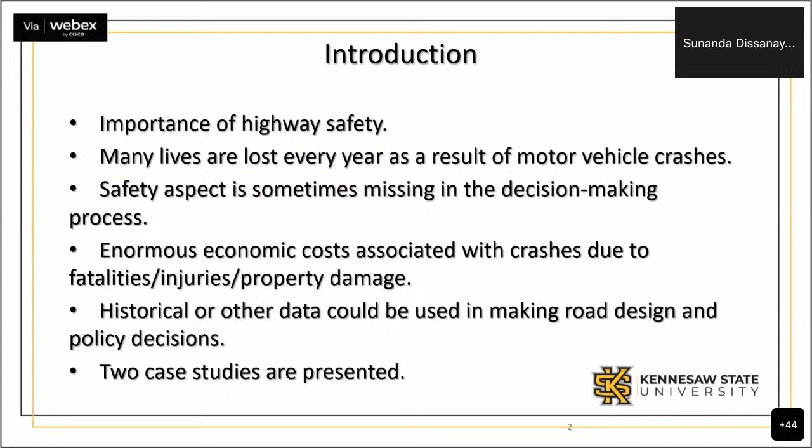So as I mentioned, we are going to talk about 2 case studies here, 2 different ones. So the first case study is about safety effectiveness of bypass lanes at unsignalized rural intersections. So this is a little bit of a different project where the focus is on rural areas. So now you might be wondering, what is this bypass lane?

So if a vehicle is stopped in a through travel lane in a 2-lane roadway, 2-lane means we have 1 lane in each direction. So if you have a vehicle, and another vehicle is going to overtake, there's no way to do that because you have only 1 lane. So what we are doing here with bypass lanes is you add that additional lane only for a certain small stretch at that intersection so that you can have that vehicle overtake the other waiting vehicle. So there could be 3-leg intersections or 4-leg intersections in terms of bypass lanes.

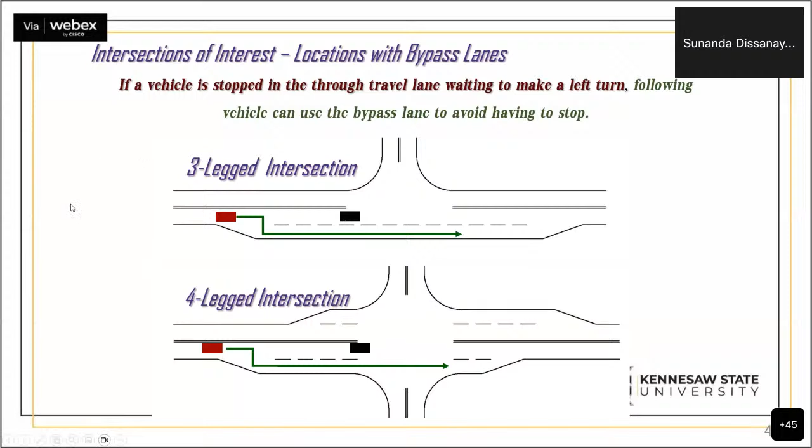So here in the United States, each and every state has a very extensive crash database. So in this case, we use the crash database from the state of Kansas, and we have to identify the locations where the bypass lanes were present. So there are two different ways that you can consider that. You consider a fixed distance. In this case, in the literature, commonly we use 300 feet. Of course, we are still using the US customary units here, along each of the approaches leading to the intersection. Or you can consider crashes at the location which are labeled as intersection related. So in that case, we do not consider any particular fixed distance. So these are two different approaches you can consider in looking at the crashes.

It is also important to note that here in the US, we prefer to use the word crashes instead of accidents because we believe that crashes could be addressed either by road design or education or all those countermeasures we have. So I'll be using the word crashes throughout my presentation.

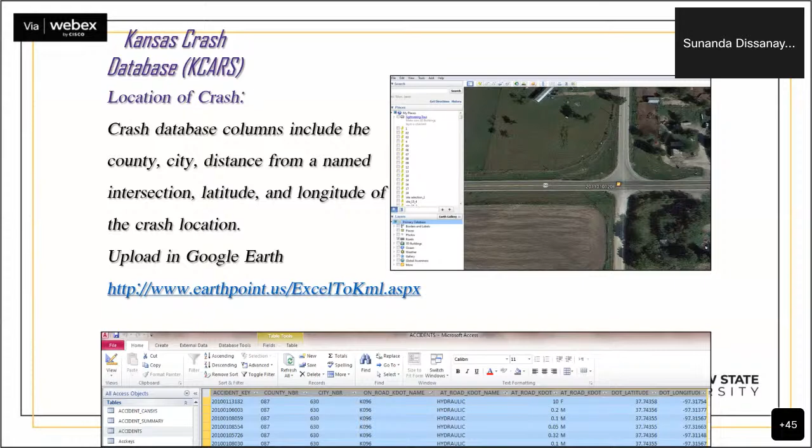So in the crash database, we can identify the county, the city, the distance from the named intersection, the exact latitude and longitude of the location and all that. And we transform those things into Google Earth, where you can map each one. In addition to that, the state also has a very extensive state traffic count map available. However, this is not the case for very small roadways to which these 2-lane roadways may be connecting. So I will talk about that a little bit later.

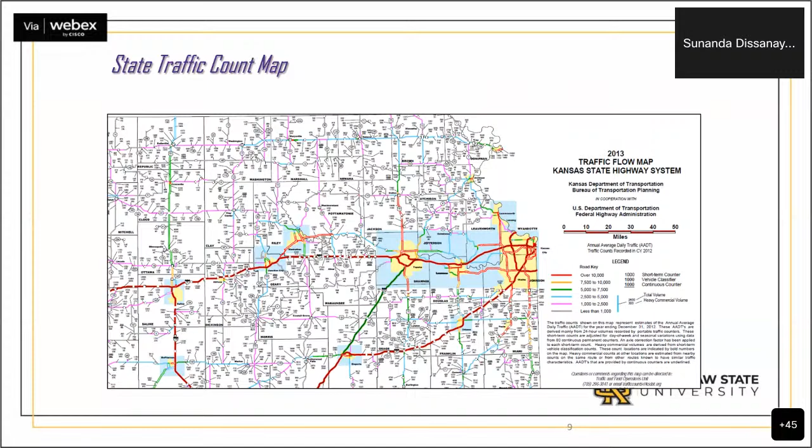So in order to evaluate the safety approach, we have two commonly used methods. We have before and after studies and with and without studies, which are also known as cross-sectional studies. So first, I'm going to talk about this safety analysis that we conducted using before and after studies. So this is relatively straightforward. What we are doing is we are comparing crash data before the bypass lane implementation versus crash data after adding the bypass lane.

So one of the challenges that we faced here is we did not know the exact timing of the implementation of the bypass lanes because these are small rural locations, not very big roadways with a lot of traffic. So even the area engineers were not precisely sure about the date of implementation, which is critical when you are considering these before and after studies. And for that reason, we did not completely rely on before and after. We also considered that with and without scenario.

So when you look at the sample size, we had a couple of options in considering the time period. Typically in safety analysis, we consider a 3 years time period, which is kind of the compromise between the desire to have a decent sample size and without too many changes in other things within that time period. However, since these are rural intersections that we are talking about, that may not be sufficient. So we looked at 3 years and 4 years and 5 years. So you can see the sample size, the number of intersections we can consider.

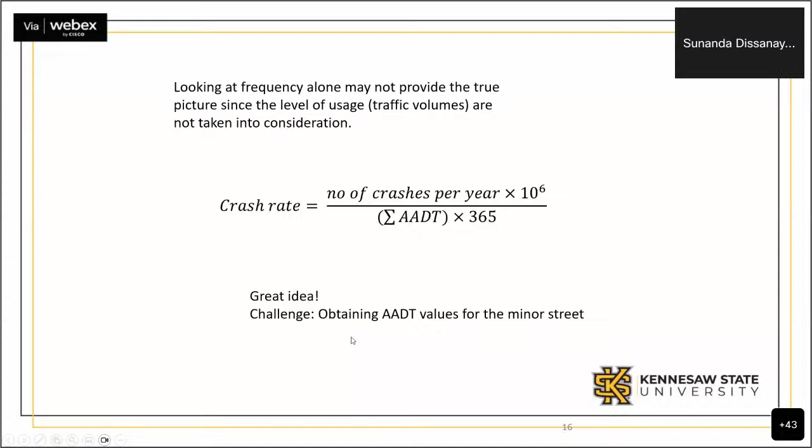So we kind of took an approach. What we did is, in the survey form, we conducted a survey among the transportation engineers and traffic engineers in the region. We asked them about the traffic volume. We could also find some AADT values from the crash database, and some others from the traffic count maps.

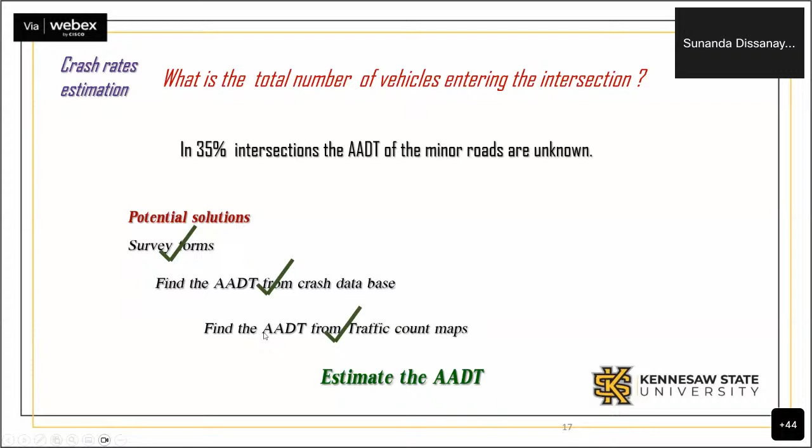So for those locations where none of those are available, we decided to develop a model based on various socio-economic, demographic, and traffic characteristics. I'll take a little diversion to show how we did that. We considered a number of variables, and the output is going to be the sum of average annual daily traffic, or the total entering volume at the intersection. So based on the available data, we developed a model.

That means you identify the factors that are significant in contributing towards having these vehicles on the minor street. Again, this is not excellent or highly accurate. As you can see, the R square value is 0.688, but this was better than nothing. So for the cases where we did not have the minor street volume available, we utilized the model and considered the total entering volume, and based on that computed the crash rate.

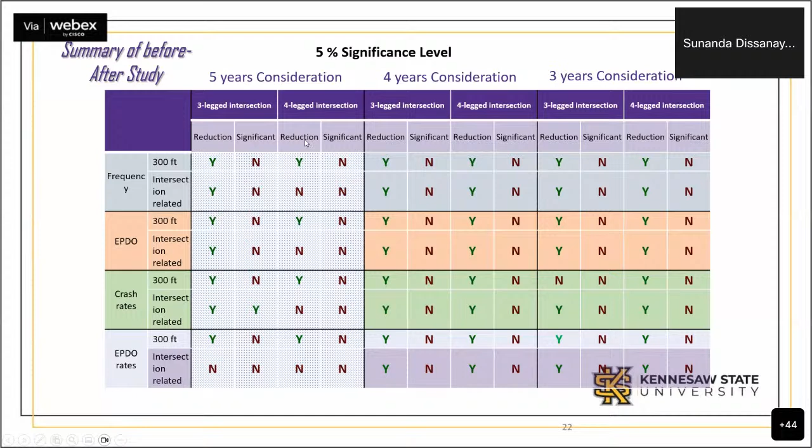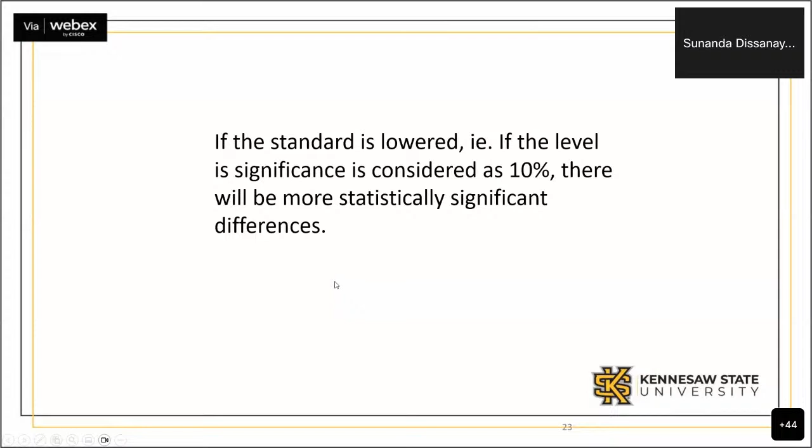To summarize the results from that part, we considered multiple approaches. We have 5 years, 4 years, 3 years, and then frequency, EPDO, and crash rate based on frequency and EPDO rates. Y means there's a reduction, and whether it is significant or not is in the other one. Another consideration is the level of significance. If you consider the 0.05 level, you might have fewer significant cases, but if you raise the significance level to 10%, we have more scenarios which are statistically significant.

And then, as I mentioned, safety analysis is not a definite science. You can look at things in different ways. And people question, why did you do this, not that? Maybe that would give you different results. So for that reason, we considered all possible approaches and methodologies to evaluate the scenario.

So this is the second approach, where you have safety analysis based on with and without studies. The crash data at intersections with bypass lanes are compared with crash data at intersections without bypass lanes. Again, in this case, we considered crash data for 3 years. We are following the same path as before, so I'm going to go through this a little fast. We considered crash frequency, crash rates and severities, and EPDO rates.

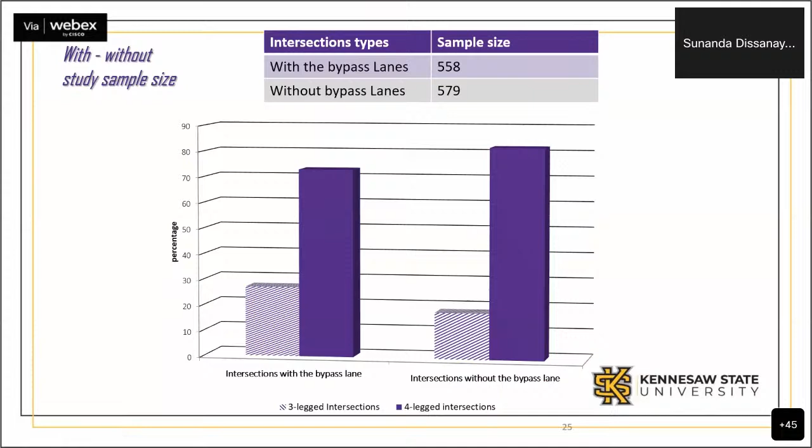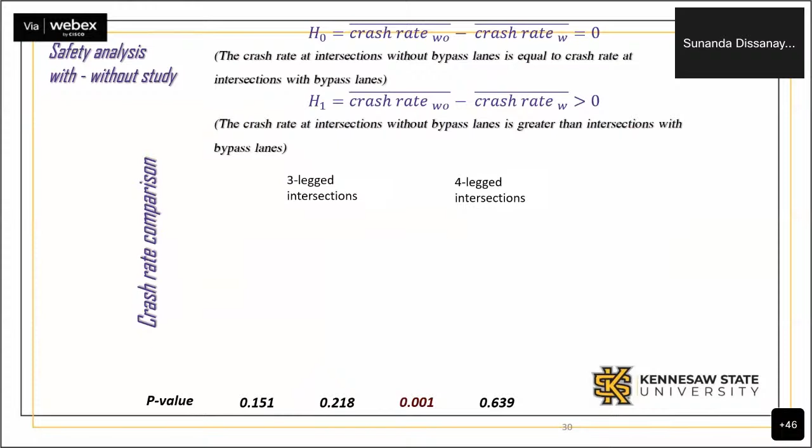So I think I'm going to go fast just to show that we followed the same process like the previous case, before and after study, and had our findings. And again, we summarized those things in a big table to show the difference between the different scenarios we considered.

And the third approach we took here is using crash modification factors. So you might be familiar with this term in safety analysis. Crash modification factor is a kind of a multiplicative factor that is used to compute the expected number of crashes after implementing a given countermeasure. So if the CMF value is greater than 1, that means we are expecting an increase in crashes for the given countermeasure. If it is less than 1, that means we are making an improvement, and that is going to have a reduced number of crashes at the location.

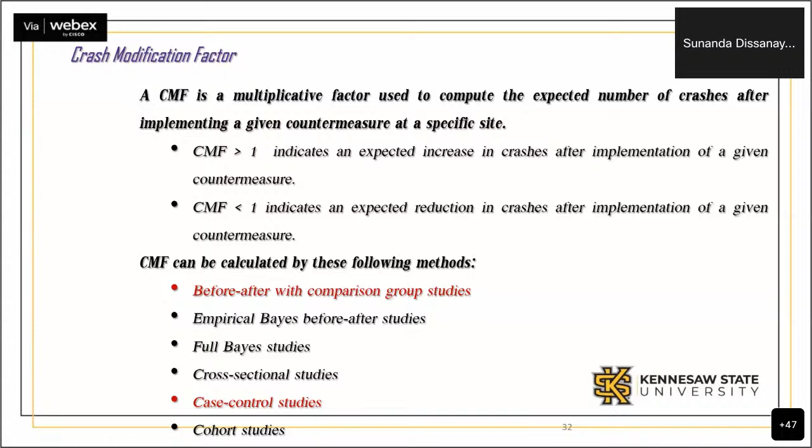So the Highway Safety Manual provides very detailed information on how this CMF could be calculated. Again, there are a number of methods available, and in this case, we used before and after with comparison group method and case control studies. I'm going to skip the details because I want to leave some time for questions at the end.

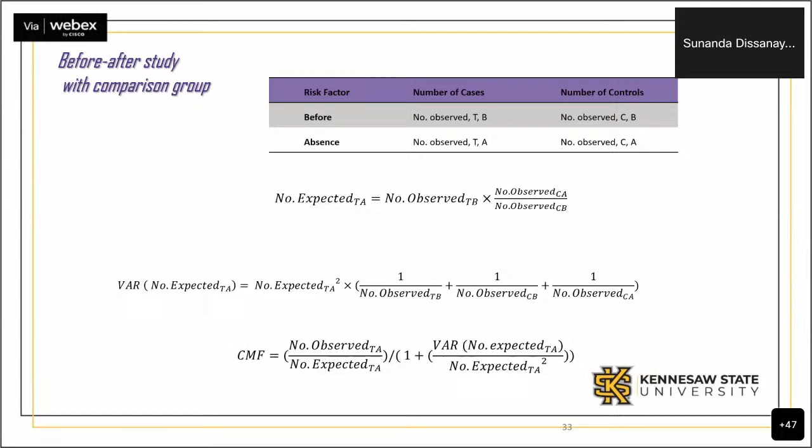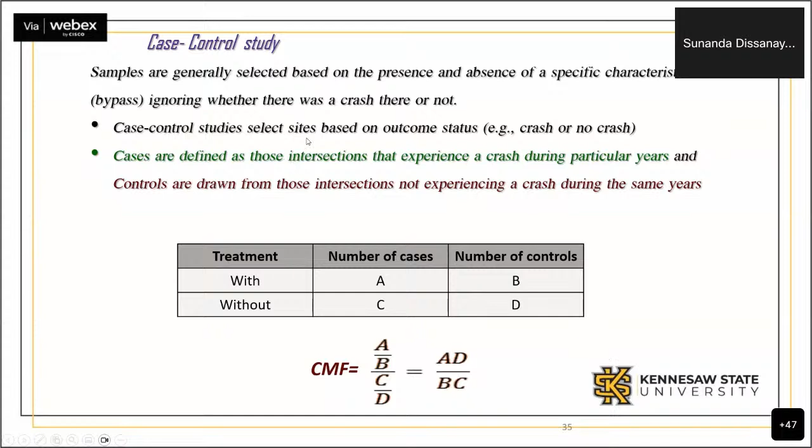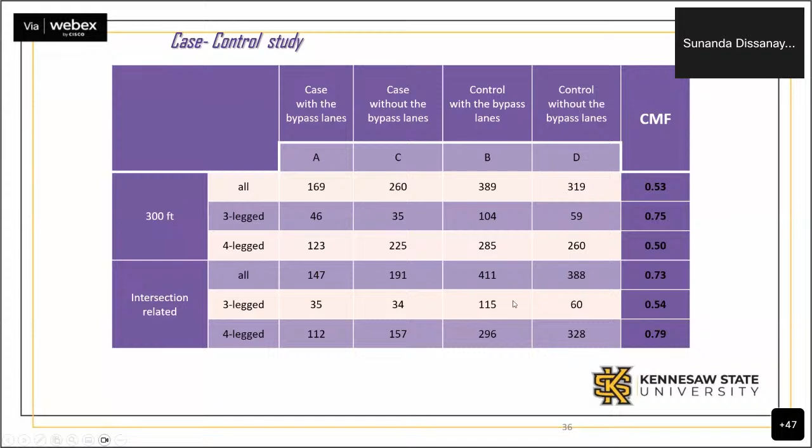And then similarly, using the case control study method, again, I'll skip the methodology, but if you are interested, that whole detailed methodology is available in the Highway Safety Manual. So again, we computed the crash modification factors by using a 300 feet intersection box and also considering intersection-related crashes. In almost all the cases we considered, the CMF value was less than 1.0, meaning that we are improving safety by adding these bypass lanes.

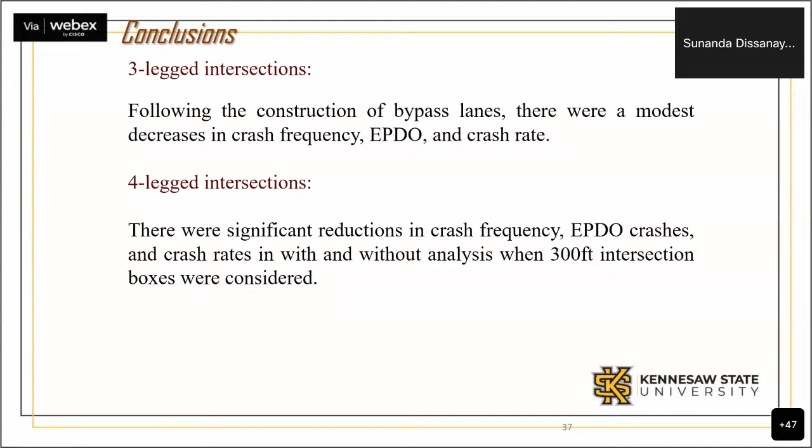So conclusions based on that, in almost all the cases, we could improve safety by adding the bypass lanes. Of course, another important consideration in the decision-making process is the cost, where you have to consider a benefit cost analysis and look at the cost as well. But the general conclusion is the agency, which is the Department of Transportation in this case, would continue adding bypass lanes because it brings safety benefits to the road users.

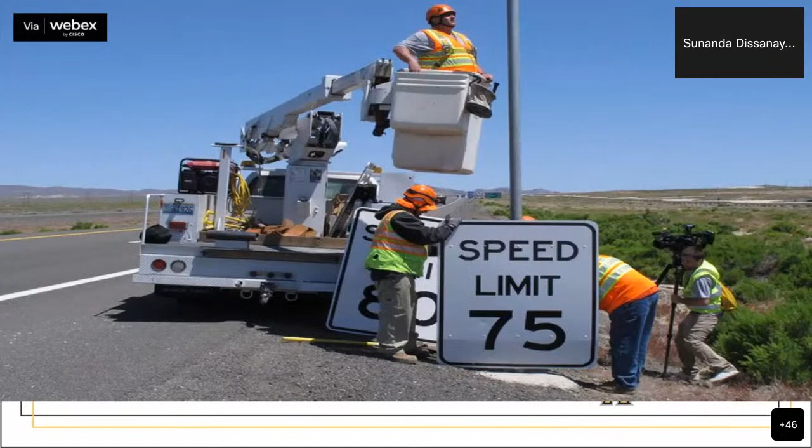So with that, I'm moving on to the second case study. Again, safety implications due to raised speed limits on freeways in Kansas. For us in the transportation community, we cannot emphasize enough the importance of proper speed limits. So this shows the location where they are changing the speed limit on the freeway, which is the interstate connecting major states.

So proper speed limit is essential for safe and efficient traffic operations, and you have to balance these traffic operations with the safety aspect. In the US, typically when the operational conditions are not very congested, when there are good operating conditions, speeding is very common, and we pretty much always drive above the posted speed limit, which is kind of the driver behavior in this system. So the operating speeds are going to be much higher than the speed limit that we are posting. So that means if you increase the speed limit, people are going to drive at even higher speeds than that.

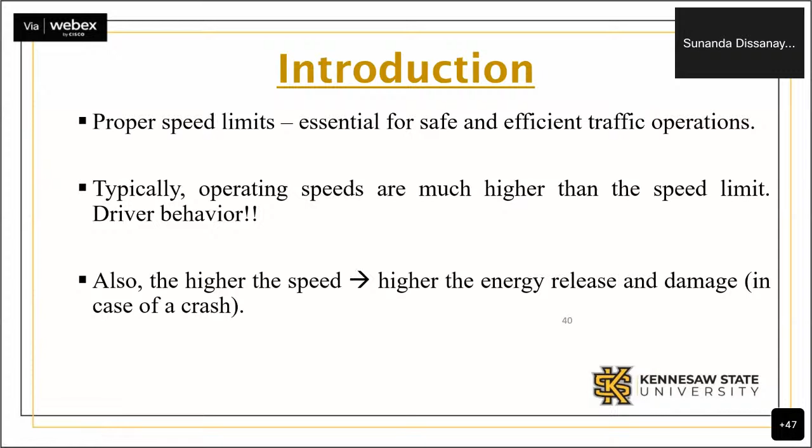And also we all have learned physics at some point, and if the speed is higher, if there is going to be a collision or a crash, higher energy is going to be released. That means more damage. So if a crash happens at a higher speed, your severity is going to be high. Whereas if speed is low, you can expect the severity to be lower in general. So because of that, safety and traffic operations go hand in hand, and it is critically important to select the proper speed limit.

So in the state that I'm referring to here, the speed limits have been raised several times. In 1996, they raised the speed limit on the interstate or freeway sections from 65 to 70. And then again in July 2011, with the influence of the transportation community and of course some politicians, the speed limit was increased from 70 to 75 miles per hour. So if you convert to kilometers per hour, you can see this is a pretty high speed that we are talking about here. So with this increase, there was more talk about whether we should increase the speed limit further and make it 80 miles per hour from 75.

So it was important for the agency to decide what to do, what the implication of the previous speed limit increases was. This understanding will help future decision making. So they funded the project to study the safety implications based on that raised speed limit.

So the research question, or the design or policy decision that we had to make here, is: should the agency continue to raise the speed limits on freeways, or should we maintain that? And of course, it is very unlikely that the speed limit on a freeway would be reduced here in the US, because we drive fast here, even though there are so many crashes and high severity property damage and fatalities.

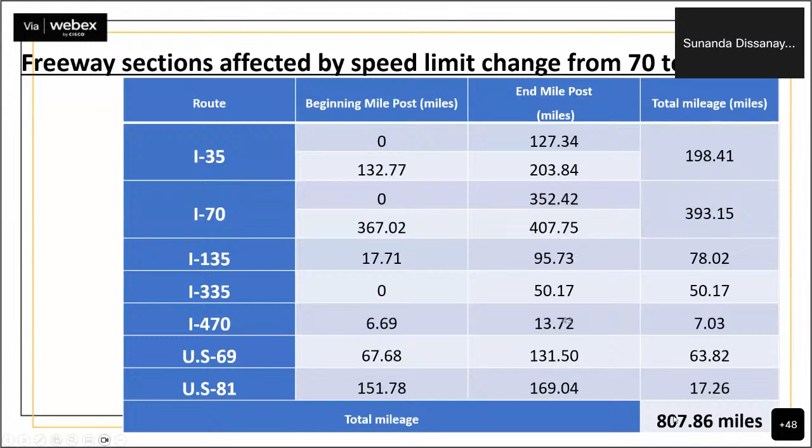So from that mileage, we selected 39 uniform sections. As you know, when you identify the sections, the typical characteristics of the roadway should be pretty uniform so that you can make a meaningful comparison. So we selected 39 sections like that.

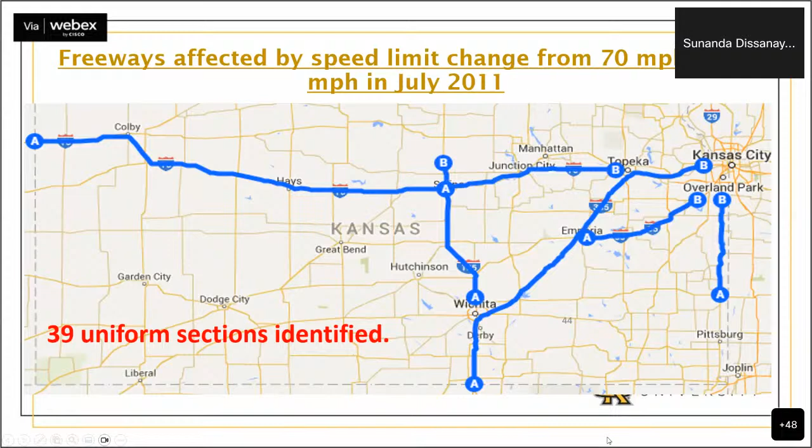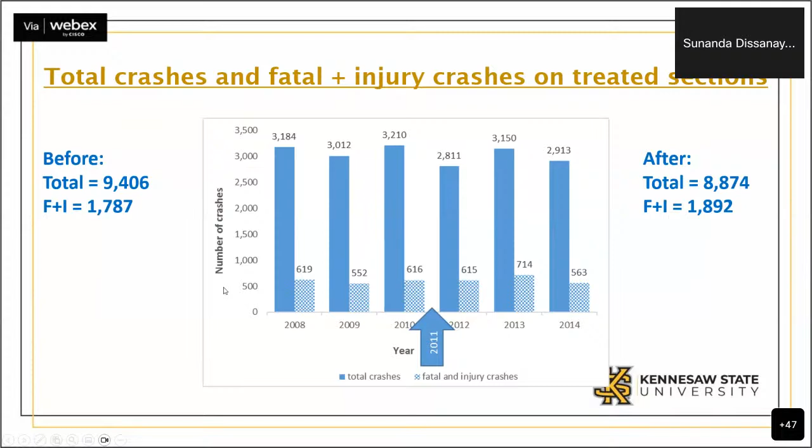And in general, if you are looking at the fatal and injury crashes and total crashes, this is how it looked. We looked at 3 years before and 3 years after, and just by looking at numbers, in the before time period we had 9,000 crashes, after pretty close to 9,000 but a little less, and then fatal, and it is giving different messages, different interpretations depending on the numbers. So it showed that this is not going to be enough. You have to do more detailed analysis to see whether there were safety implications based on the raised speed limit.

So once again, we use the crash modification factors that I mentioned earlier, with the methodology from the Highway Safety Manual. In this case, we are using a before and after study using the empirical Bayes method by considering the treated sites, meaning the sections where the speed limit was increased. And then a before and after study with comparison group, considering both treated sections and other similar non-treated sections.

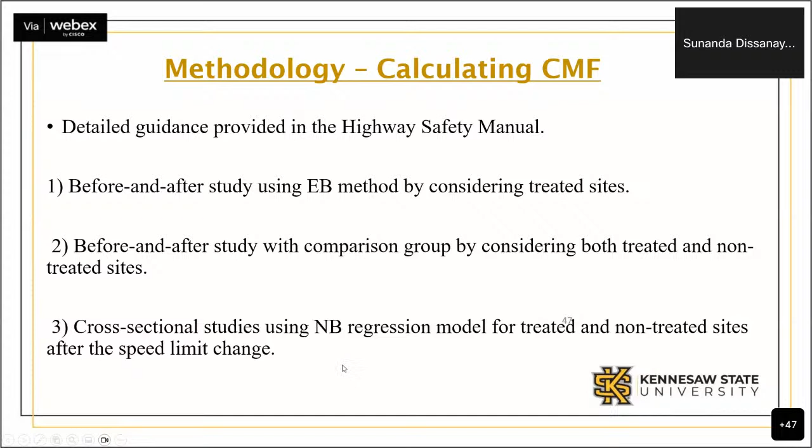And then we had cross-sectional studies using a negative binomial regression model. So we used all these different methods, and the data needs and data availability were different for each method. So whenever we had data available, we applied that methodology for comparison purposes.

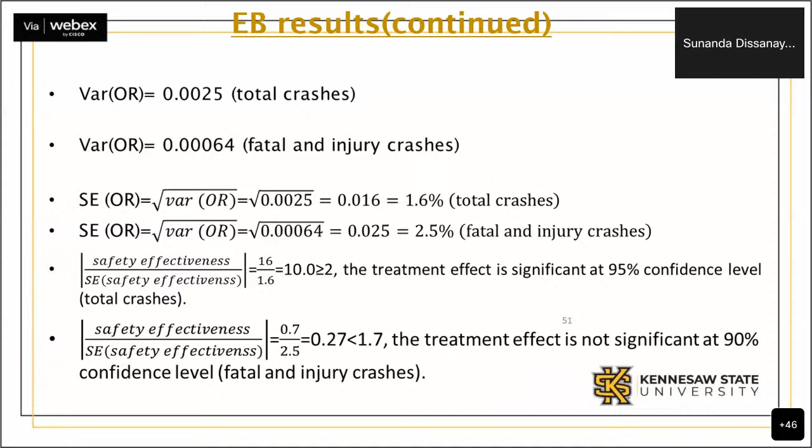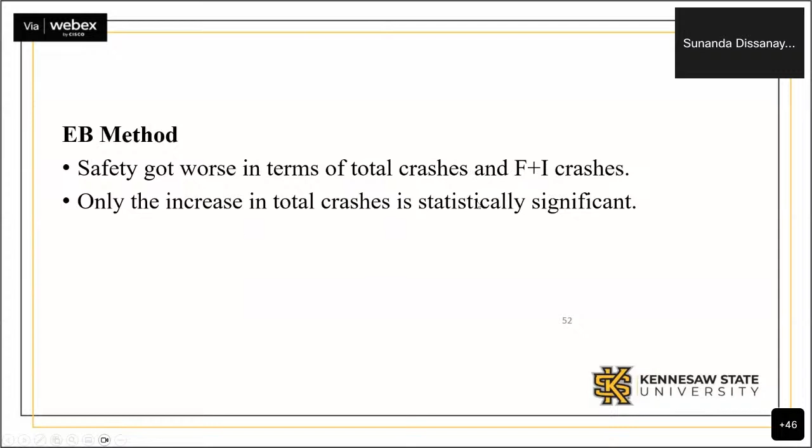And then we looked at the variance of the odds ratio and tested for statistically significant difference. The treatment effect in this case was significant at the 95% confidence level. And for fatal and injury, it was not significant at the 90% level. So even though the data showed a change, it was not really statistically significant. So the EB method summary: safety got worse in terms of total crashes and fatal and injury crashes. Only the increase in total crashes is statistically significant.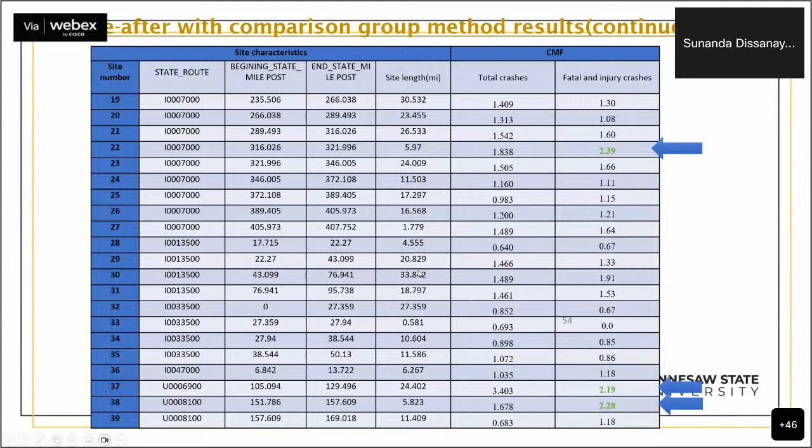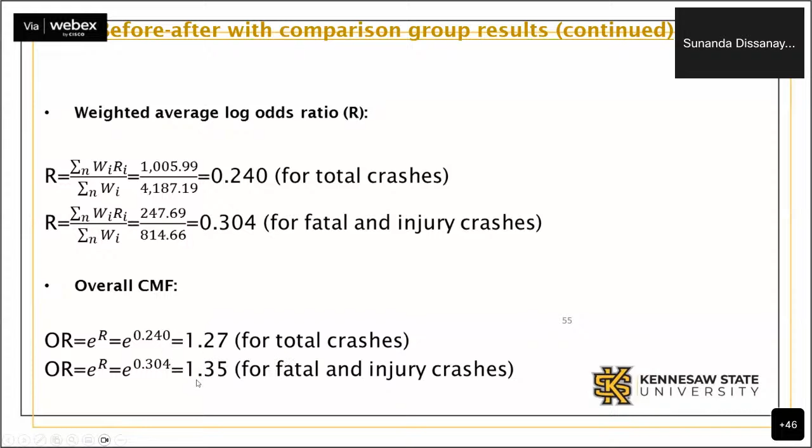And then we used the second method, before and after study with comparison group method, and we calculated the CMF values again. So site characteristics, the CMF values, and these are the detailed results for each and every section. We also calculated the odds ratios: 1.27 for total crashes and 1.35 for fatal and injury crashes.

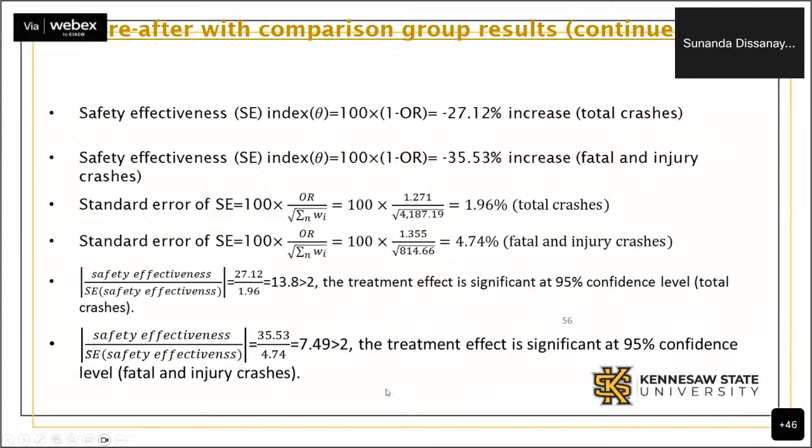So again, we tested the statistically significant difference between the two cases, and the treatment effect was significant at the 95% level. And for fatal and injury, it was also statistically significant. So total crashes increased by 27%, and fatal and injury crashes increased by 35% using this method. And both of those were statistically significant at the 95% level.

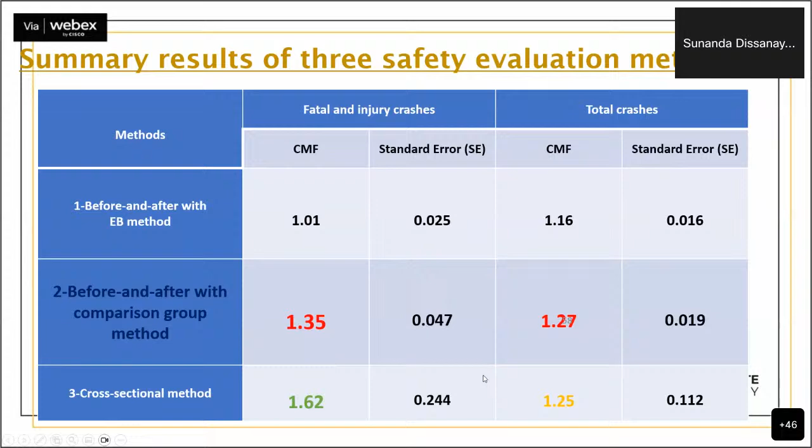So summary results: I did not go into the third method which we used, but summary results were that safety got worse in many of the cases that we considered. So in addition to the crash data analysis, we also conducted a speed study to compare before and after, looked at the 85th percentile and 50th percentile or the average values, and conducted statistical testing to see what really happened. And of course, it showed that average speeds increased.

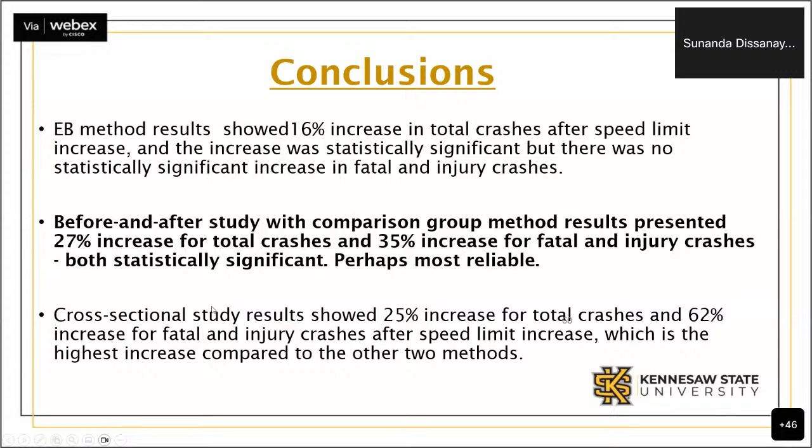So to summarize, the results showed that the before and after study with comparison group method presented a 27% increase for total crashes and a 35% increase in fatal injury crashes, both statistically significant. So this is perhaps the most reliable one, as we found out. That means by raising the speed limit, safety got worse because there were more severe crashes because of the higher speeds.

So the decision was not to keep on increasing the speed limit on freeways without further study. So that was the policy implication, which was also shared with the group of individuals who were really promoting further increase in the speed limit, saying that it would benefit by reducing the travel time in long distance travel.